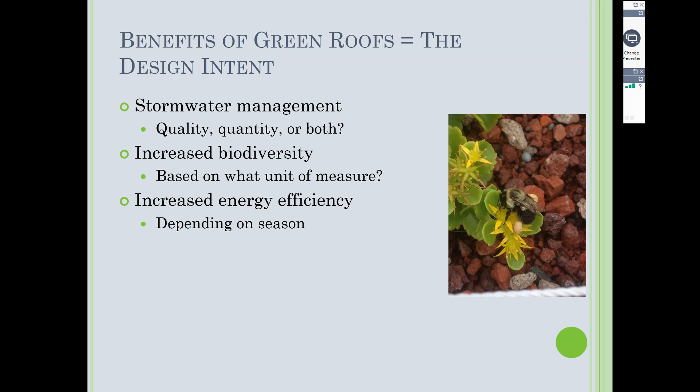And so the good news is in Chicago and other northern urban climates, the benefits of the stormwater management outweigh whatever you lose in your energy. And in all of his scenarios, the winter loss was made up for in the summer. But you do need to know it's not just a one-size-fits-all general, oh, green roofs are going to make my building so efficient, because it depends.

A reduced urban heat island effect, that is to say that a vegetated rooftop is cooler than a non-vegetated rooftop. You're not going to see a noticeable reduced urban heat island effect. You're not going to walk out of your building in the middle of Manhattan and say, wow, it feels so much cooler now that they put that green roof on the building 3 blocks away. You would have to vegetate all of the rooftops. But if we did that, we would see a noticeable decrease in our urban temperature.

Noise pollution management. I haven't seen any stateside research done on this. There is some very interesting work that's been done in Japan and China on using green roofs to mitigate noise pollution, both from above, and they've studied placing a green roof. If you have a terraced building where like one floor looks out onto the roof of another floor, if you green that roof, you get a lot less noise pollution from the street. So that's kind of cool.

Increased aesthetic, we know that when people can see plants, they are more efficient in their working environments. They are happier, and so that's good. Urban agriculture, that's kind of a new field. The last 2 or 3 years of research, we've seen that done.

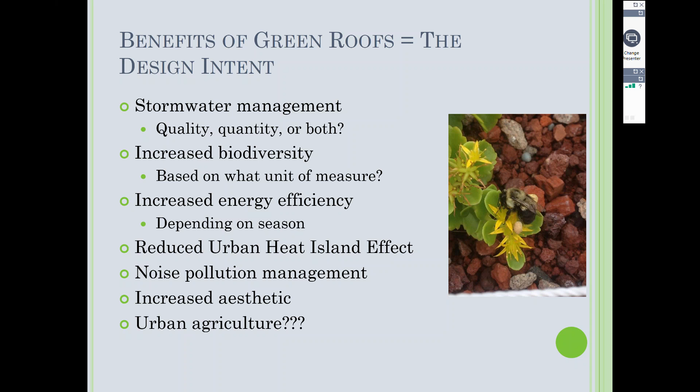My strictly opinion, not based on anything other than a few of the papers I've read, my gut tells me you get more of a social benefit from urban agriculture, from rooftop farming, than food production, because the roof access and safety, and we do have some results out of Spain and Sydney, Australia, that show to produce food on a roof, you use way more water and other inputs than if you try to do that traditionally. So I think you get a very measurable social benefit. I don't think it's a sustainable farming practice, though.

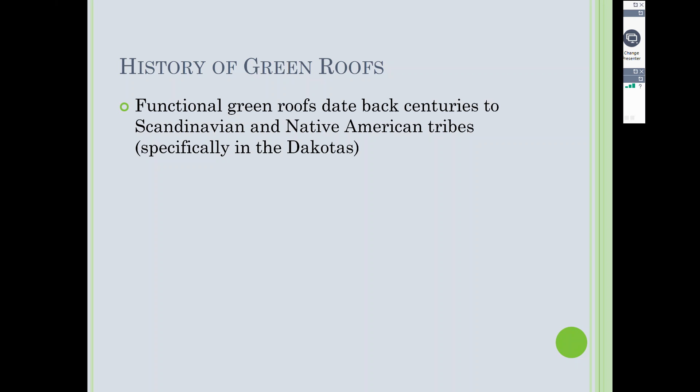History of green roofs. I read this really cool paper back in 2010, and I've quoted it a lot, and people are always surprised to hear this, so I repeat it a lot. Functional green roofs date back centuries. Scandinavian and Native American tribes, specifically in the Dakotas. Aesthetic green roofs, we always hear the Hanging Gardens of Babylon example. We obviously never saw those, but we know based on written accounts, probably those were very elaborate rooftop gardens. They weren't actually hanging in the sky, they were on the rooftops.

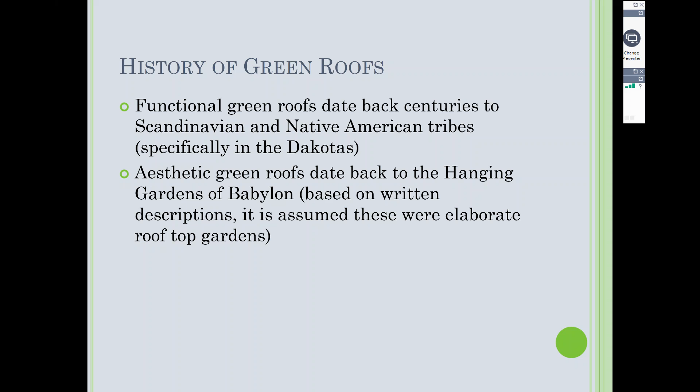Modern green roofs. This is the study that I reference now quite a bit. Manfred Kohler published a paper in 2010. He went through all of the historic green roofs in Germany, and I think his limit was 100 years old and older, and there were quite a few that had survived both world wars. And I cite this a lot, and this came directly from this paper, and people are always surprised to hear it. Despite what some German practitioners would have you believe, the first modern green roofs were an accident.

No one set out to create a green roof. It happened accidentally, and here's how it happened. And this is from Manfred Kohler's paper. In 1839, a barrel maker invented a way to waterproof a roof. And he did that by combining 4 sheets of paper and tar.

Well, once he waterproofed his roof, he wanted to protect the paper from UV light because he knew if it broke down in the sun, he would lose his waterproofing. Makes sense, right? Okay. Well, when you build a building, you usually have to excavate some amount to get the foundation level. So he took that excavation and put it on top of the tar paper to protect it from UV light.

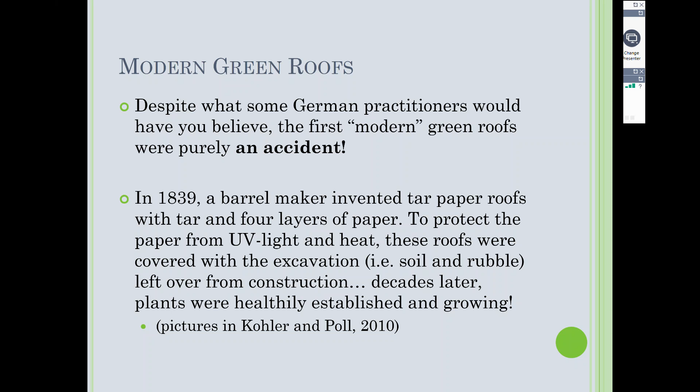And they were lovely. That's what really started the green roof movement, realizing that these plants could grow on a rooftop without much input. That started the modern industry. And that leads us to standards and guidelines. This is something that I drive home in my classes. There's a distinct difference between a standard and a guideline.

A guideline is a recommended but non-mandatory specification. A standard is a mandatory, quantifiable specification that sets the lower limit for acceptable quality for something, whatever that thing may be. The word mandatory implies that there are repercussions for not meeting the standard, and the example I like to use for both of these come from OSHA, because everyone knows OSHA, okay?

So OSHA has standards for eyewear, okay, right? So your eyewear in a construction site should be stamped Z87. That means it meets OSHA's limit for eyewear. It's a standard. If you don't meet the standard, you can be fined by OSHA. OSHA also writes guidelines. They write guidelines on heat stress and sun protection.

The reason they make it a guideline, which is a recommendation and not a standard, is because OSHA recognizes that, for example, 85 degrees in dry heat in Arizona is very different than 85 degrees in the humid heat of New Orleans. So they can't just say, all right, anything over X degrees means you have to do such and such for your employees so that they are protected against heat stress and heat stroke. They also recognize that different humans handle different levels of heat differently.

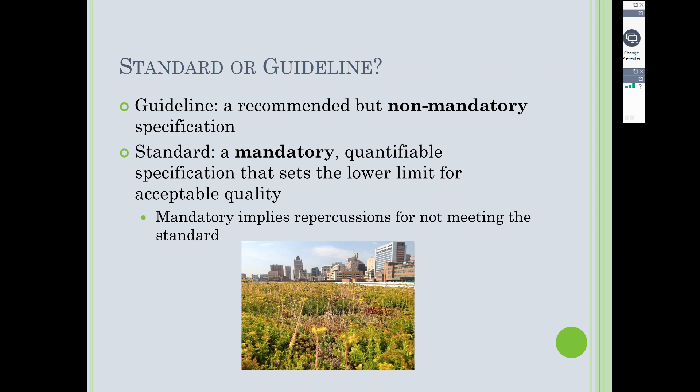So again, they recognized that green roofs, whether intentional or not, were becoming a thing. And once people figured out they could be a thing, they were starting to do them intentionally. So the landscape industry recognized that this basically was landscaping just a few stories up, and they decided to write a manual, a guideline, a recommendation for how to do this best.

The FLL, it's pretty comprehensive. It's not all-inclusive, but they give particle size distribution, water holding capacity, pH, all of these guidelines for the substrate. They give guidelines for plant coverage, all sorts of best practices. It's a really good guideline. They never meant it to be adopted worldwide, but since they were the first to do any kind of a manual or best practice for green roofing, they unwittingly developed one of the first worldwide guidelines for green roofs.

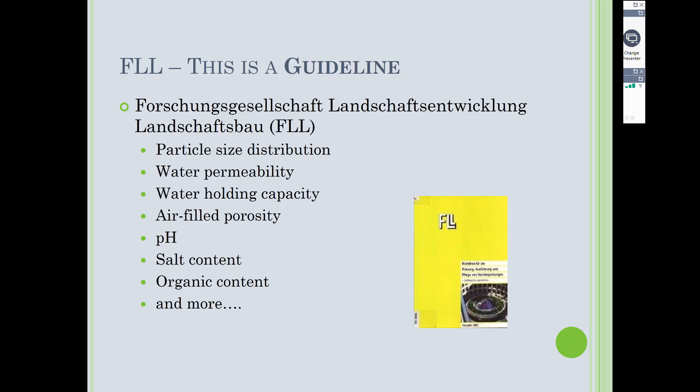So municipalities and countries around the world started adopting their guidelines. We go to the ASTM now. The ASTM is a standard. As of a few years ago, there is a subcommittee comprised of civil engineers and practitioners who are writing standards for the green roof industry.

Here's my beef with the current subcommittee. Many of those members are civil engineers and private sector practitioners who are selling their own system designs. Now, most of their 14 standards right now revolve around the geotextile fabrics, but there are a few of interest. There are fire tests. The fire test standard is excellent. You got to know that your building is not going to be more susceptible to fire if you have a green roof on it.

Saturated water permeability. This is one that I don't think was done very well. Here's why. For saturated water permeability, the ASTM standard says that you need to soak your sample 24 hours before you do the test, right? That's standard. That's an actual soil science and agronomy practice. That's a civil engineering practice. It makes sense that they would have written the standard that way because that's how we test water permeability for medias. That's what we do.

Okay, the problem is that gives you a truly saturated media. All of the water sits there for 24 hours and pushes all the oxygen out. Green roofs don't get saturated, not like a lab test. I have data from my dissertation where my green roof platforms were rained on for 72 hours straight during Hurricane Sandy, and my water holding capacity still only maximized at 28%. If you soak a substrate for 24 hours, you're going to every time in the lab get 50% or more water holding capacity. That means we're overestimating how much water our green roofs can hold.

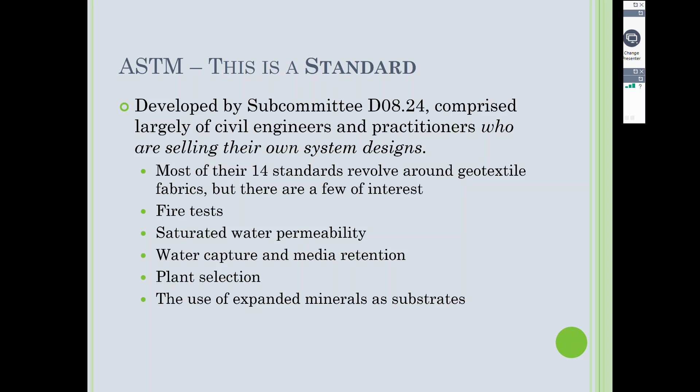LEED. This is neither. LEED is one of the organizations that kind of drives green roofs right now. Leader in Energy and Environmental Design. It's a certification program that's sponsored by the U.S. Green Building Council. And so basically, if you're doing new construction for anything really, you can fill out hundreds of pages of documentation and show all of the ways that you have been a leader in energy and environmental design. You send that application and a check in to the U.S. Green Building Council. They go through it. They come and look at your building, and if you meet and add up enough points, you can earn silver, gold, or platinum LEED certification.

That comes with a bright, shiny plaque that you can hang in your lobby and boast that you are a leader in sustainability because you have met the LEED standard for whatever certification you earned. You can earn points for everything from having low emission glazing to only using building materials within a 500-mile radius. There's all sorts of things. It's very comprehensive. Last I checked, you could only get, I think, 6 points for having a green roof, but 6 points can make the difference between no certification or silver and gold. So we often on LEED buildings do see green roofs. But remember, it's not a standard.

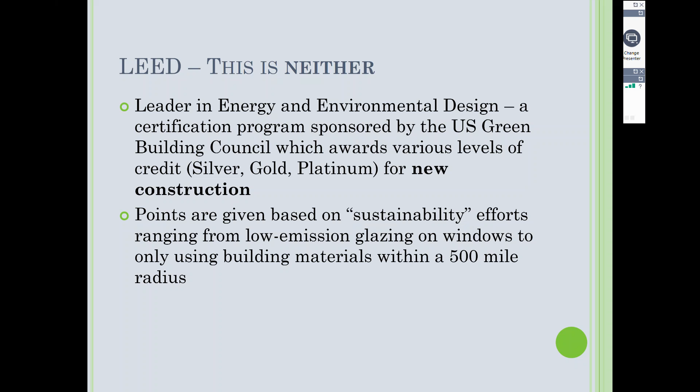Here's my unadulterated, honest opinion. It's a money grab. I have yet to see data-based proof of a measurable environmental impact. That is not to say that it's not good, it's just not great. Certifications for LEED buildings can go over $20,000. This is direct from their website. Tell me this is not a money grab. You can also be a LEED certified professional if you pay $400 after you've paid for your membership, plus the cost of the study materials. Are you starting to see a trend?

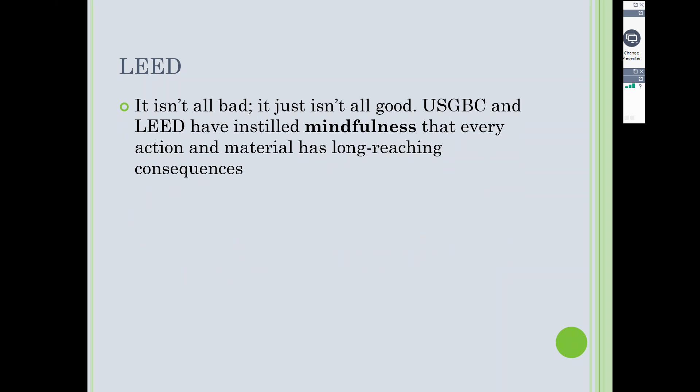That's not to say it's all bad. It just isn't perfect. They have instilled mindfulness that every action and material does have long-reaching consequences. My beef with LEED is they don't have any performance-based accountability, and I'll tell a short story. When I was an undergrad at Auburn University, we got our first LEED building.

Auburn may have more than one at this time, but at the time it was the first one. And that was when I was first getting excited about green roofs, and I was so excited that we were finally going to have a LEED building. And I want to think it was silver or gold. But it was a new construction science building.

And one of the things that that building had to make it LEED certified was we didn't have a green roof on it, but all of the downspouts for the building went into this engineered bioretention area adjacent to the building. And so it collected the stormwater in that way, and it kept it on the site. And it was awesome. Okay, well, that lasted for about 6 months.

If you've seen bioretention, you know often instead of having wood mulch, it's rocks, because rocks don't float. And if you're going to have a bioretention cell full of water, you don't want all of your mulch to float away. That's kind of a common thing. Well, during football season, I'm assuming during football season, someone saw that and it didn't match the rest of the landscape on campus and they didn't like it.

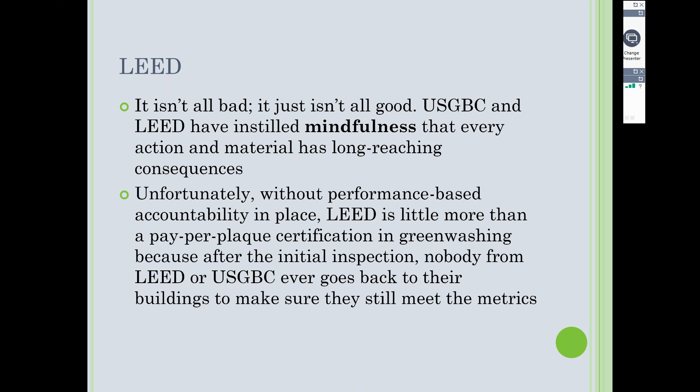And so not terribly long after, they dug that up, capped it off, and put a traditional landscape back around that building. It was no longer capturing the stormwater. The stormwater was then going into the drain. Now, did anyone from LEED come back 1, 3, 5, 10 years later to see if that building still met the metrics? No. And they got to keep the very expensive plaque that they paid for. That's my problem with LEED. Okay, moving on off of my soapboxes.

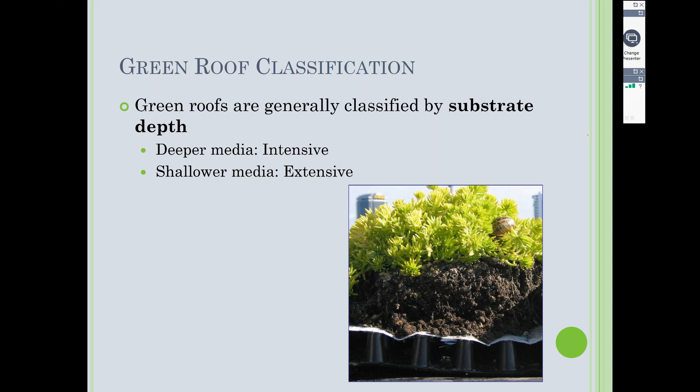The white is a filter fabric. You have to keep all of your media out of your drainage layer because you don't want to clog your drainage layer, because that kind of makes sense, right? Here's your substrate, and then here's your plants. So the depth of that substrate layer is what determines the classification here as either intensive or extensive. And the idea there is that the deeper the substrate, the more maintenance you're going to have to do.

If you are in the industry or if you are doing research, check with your state stormwater manual. I actually did this search a few weeks ago for my class. All 50 states, even Alaska and Hawaii, have stormwater management protocols at the state level. Sometimes it's their Department of Environment, sometimes it's the Department of Natural Resources. It depends on what the state is, what it's called. But every state now has stormwater management guidelines that have to be met, and most of those include green roof criteria. Even Alabama has green roof criteria now at the state level.

That typically is where you're going to find the official delineation for intensive and extensive, and it does matter because, for example, in Maryland, if you break the line between intensive and extensive, you no longer get stormwater management credits for having a green roof. It has to be extensive, not intensive, okay?

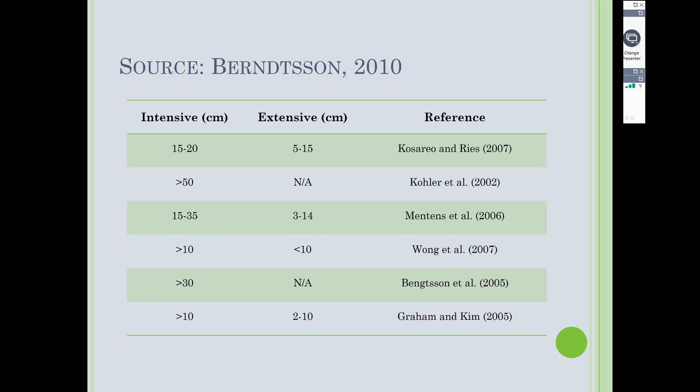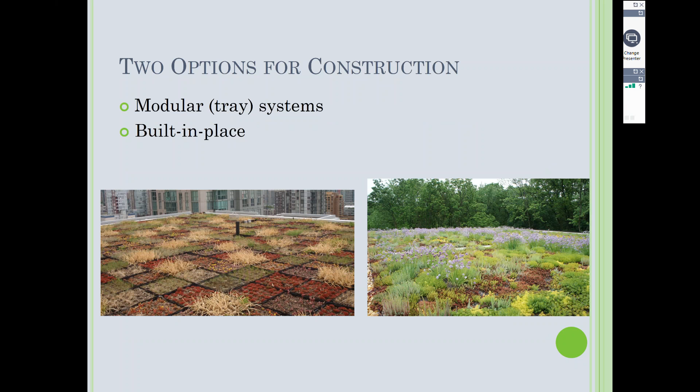All right, so there's two options for construction. You can have a modular or a tray system, or you can build it in place. I'm going to talk about each one of these. Modular systems, not a fan. Here's why. The ease of installation is a fallacy because you still need a crane. If you could get away without paying for a crane, I could possibly see the justification.

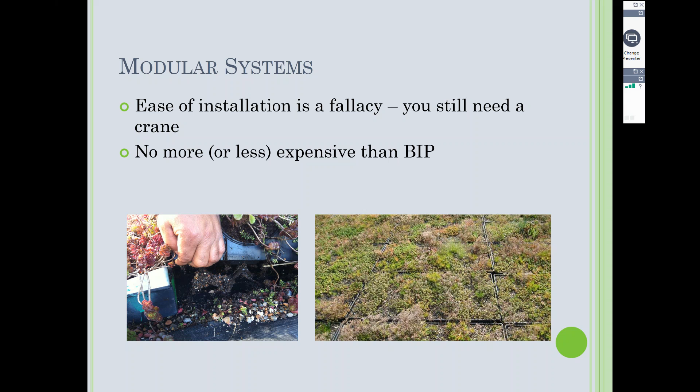The problem is it's no more or less expensive than a built-in place. Instead of paying your guys to shovel and move substrate around your roof and plant the plants, you're paying them to walk back and forth, placing trays on a roof. It's not any easier or less expensive.

Also, with a built-in-place system, you're really just paying for the labor, the substrate, and the plants. For a tray system, you have to pay for all of that plus the trays, so it kind of doesn't make sense. If you're looking at it from a sustainability standpoint, think about all of the plastics that were manufactured going into that system and tell me if it's still sustainable. And then it's a maintenance nightmare. Now,

This is going to vary based on region, but where I was on the East Coast, we had about 30 freeze-thaw cycles every winter, and that's based on my dissertation data. And what I mean by freeze-thaw cycle is in the winter, the nighttime lows were below freezing, and the winter daytime highs were above freezing. That gives you a single freeze-thaw cycle. All right, so what happens when water freezes?

It expands. Okay, so if your green roof media is up there holding any amount of moisture, and in the winter it is typically a little bit wetter, especially there, it rains more, you have snow melt. So that substrate expands and it pushes against the sides of the trays. And what happens? It breaks. And you can see the picture on the left, the media has started falling out of that tray along the bottom. In my experience, that corner where the bottom meets the wall of the tray, that's usually where they start cracking.

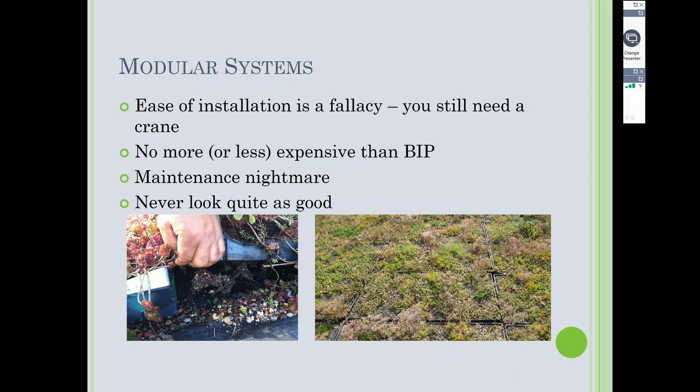And if you think about it like this, instead of one 10,000 square foot green roof, you now have 10,000 one-square-foot green roofs. Your big area is going to hold more water. Please don't do this. Okay, so here's your starting point if you're going to do a built-in-place system. This is the French Embassy in Washington, D.C. My former employer installed this system.

And what you're seeing is a waterproof roof. Now, I've heard people say, well, I don't want to put plants on my roof because it's going to come inside my building. Dude, it rains all the time and water doesn't come in your building, so you're going to have to waterproof it anyway, right? If the waterproofing is done well, then you shouldn't have any problems.

Another thing, if you're in the industry or if you're a landscaper and you're considering starting to bid on these jobs to open up your book of business, please have written into your contract or have written into your bid someone to do a certification for the waterproofing membrane before you step foot on that roof.

And that means they'll cap off the drains and they'll flood the roof and they'll shoot it with electricity, and there are wires up under the waterproofing, so if there's a leak or a breach in the system, they'll know, one, that it's there, and two, where it is so they can fix it, because the last thing you want is a leaky roof that was leaky before you got on the job, because if you go put a green roof on a roof and something, I don't know, penetrates the waterproofing membrane, you're going to get blamed.

So it's kind of expensive, but it's worth it to build into your bid to not be responsible for repairing the waterproofing membrane down the road if you didn't do it. Now, if you did it, that's a tough lesson for your employees to learn.

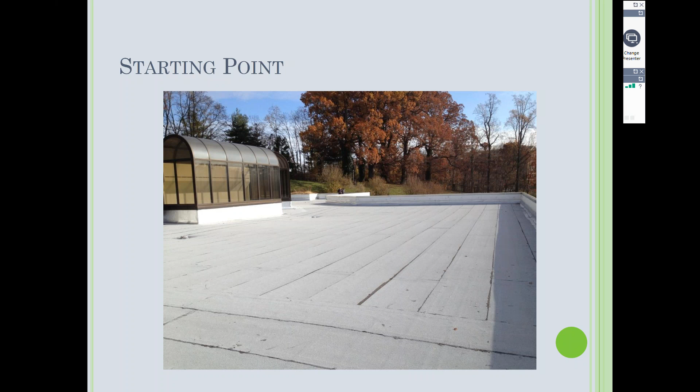Okay, so this is the waterproof roof. Here's that cut section again. Most building codes, and this is especially true in DC, most of those building codes weren't comfortable with having plants grow all the way up to that parapet wall. So all of our roofs had an edge of gravel where plants were not supposed to grow. And then the same thing around, here's a drain box.

This is a protective fabric that goes on top of that waterproof membrane just to protect it against anything that could happen. So that pea gravel would go around that drain, and then we would put metal edging that had water holes cut through it so that the water could drain out around there. So that was meant to be a protection against where the waterproofing ended and the flashing began so that roots could not grow in there.

Okay, so let's go back out of my pen.

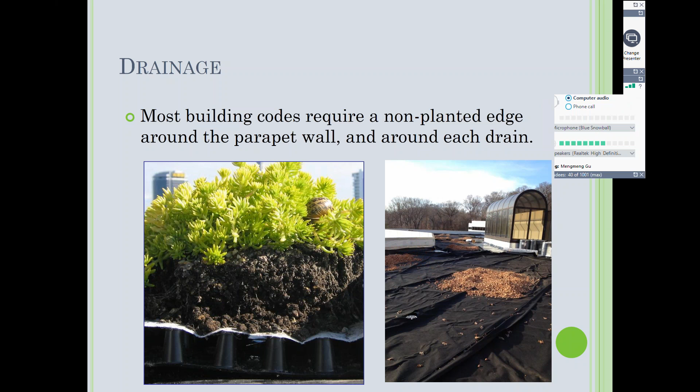All right. So here's how we got the substrate up to the roof. Now, this is a blower truck, and so basically the truck, there's a big hose here that sucks or blows the media up onto the roof. Now, in DC, because green roofs are so popular, it costs about the same to rent a blower truck for a day as it does to rent a small crane for a day. So for us, what dictated this was the French embassy said, no way you're getting a crane onto our property, so we blew it. So we would do either way.

Why is my pen not working?

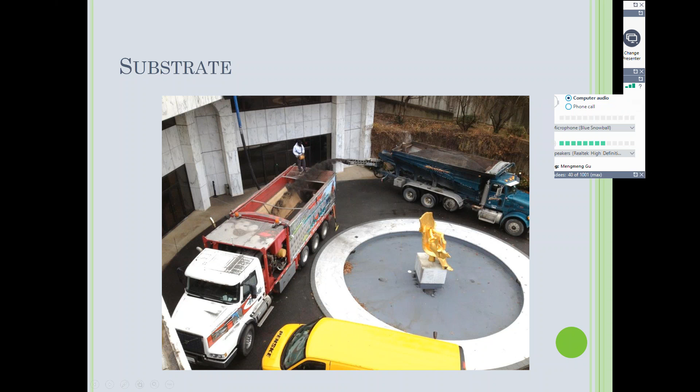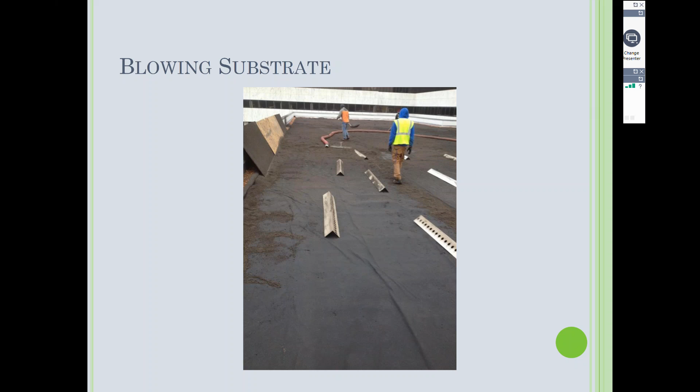Okay. Here you can see those pieces of metal edging with holes cut in them. That was going to go around the parapet and around the drain boxes. And there's the other end of the blower tube where it's blowing media. And then we can talk about various plant installation methods.

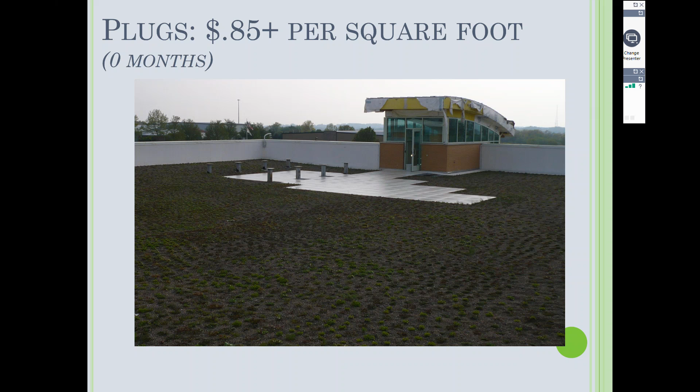So plugs, this is not a great picture, but this is a roof right after it was installed, 0 months after installation. Plugs, these prices are probably not exactly accurate anymore, but for us it was about 85 cents a square foot and up, depending on what kinds of plugs we wanted. 6 months later, we're at 80% coverage. Those are not weeds, by the way. Those are spent flower stalks from dianthus.

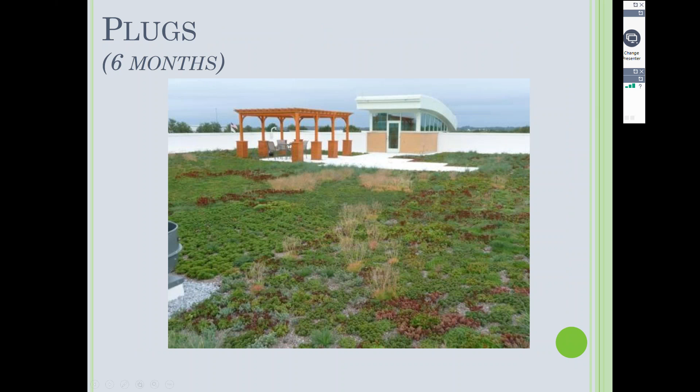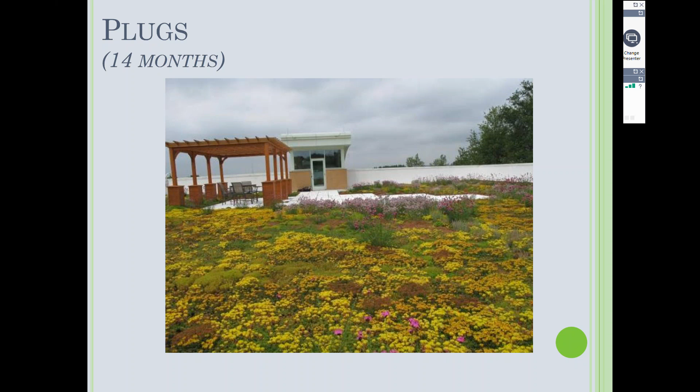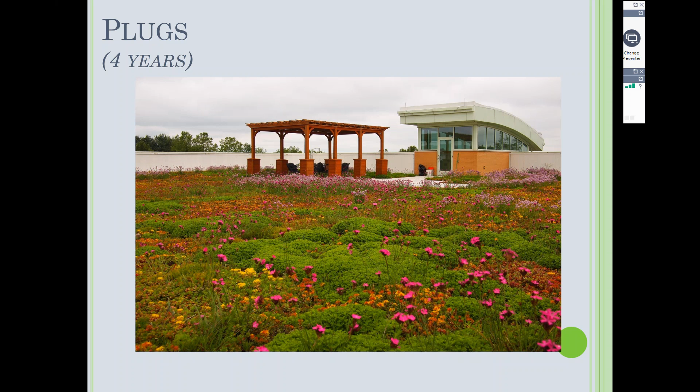14 months later, up in the foreground, you can see the dianthus in bloom. The light purple in the back is allium. We're fully covered here, and this is 4 years later. And you can see there are ebbs and flows of species. In wetter years, certain species are more prolific, and then in drier years, other species are more prolific. A mixed community planting is always going to be better so that a dry year isn't going to kill your roof. You need to have various species of sedum.

Pros for plugs, it's cheap. Installation requires little to no skill. Anyone can do it, even a Bama fan.

Cons: exposed substrate allows wind uplift. Now on that roof, we had a tall 4-foot parapet, so we didn't really have to deal with wind shear. But on some of our city roofs, especially in DC, wind shear was always a terrible problem for us.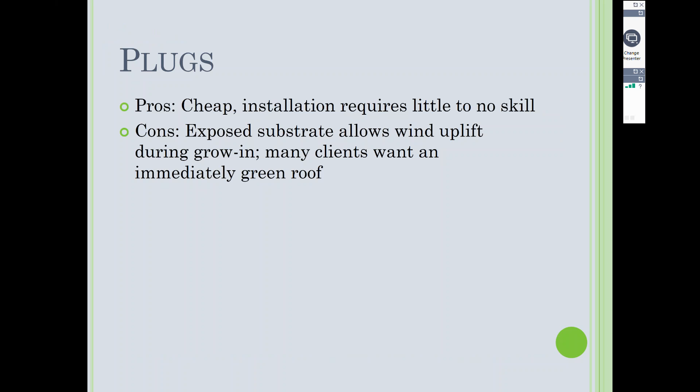And then some clients want an immediately 100% covered green roof. We had an architect say, hey, I want a green roof, but I want it to look like one solid plane of plants. He didn't want those mounding broadleaf plants. So we decided to experiment with cuttings. Cuttings 5 months later, 16 months down the road, and it looks like a pretty solid plane of plants.

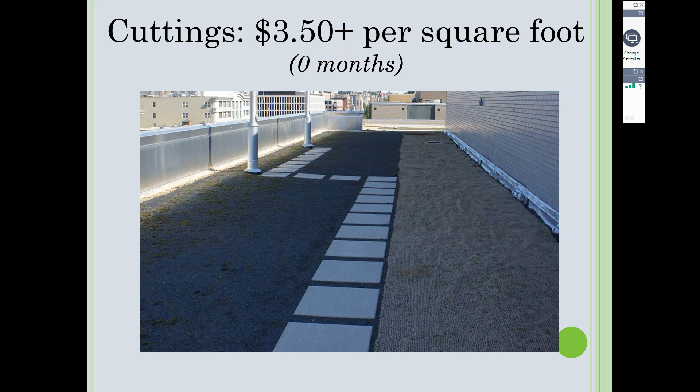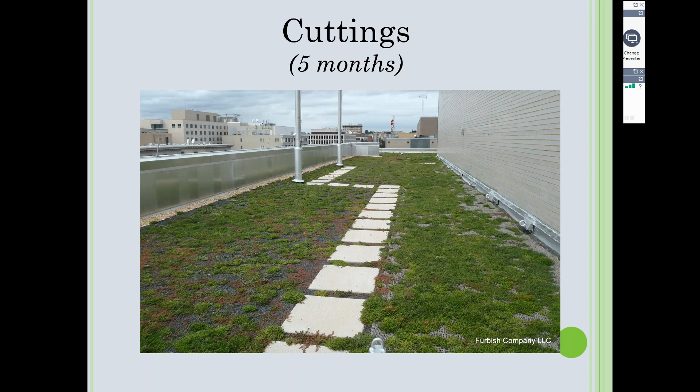And you can see there's netting on the right side. That's to protect against wind shear. It's jute. It does break down. By the time it breaks down, the plants have grown through it. No big deal. And on the left, you can see that gravel edge around the parapet wall where you're not supposed to have plants growing. Obviously, our maintenance guys had slacked up a little bit there.

Pros: faster full coverage. You can get a lawn look easier, but it can get expensive. If you have to buy your cuttings, you're looking at over $10 a square foot. Cons: you're limited to narrow-leaf sedum species. Cuttings can and will blow away, so you either have to use netting or get creative.

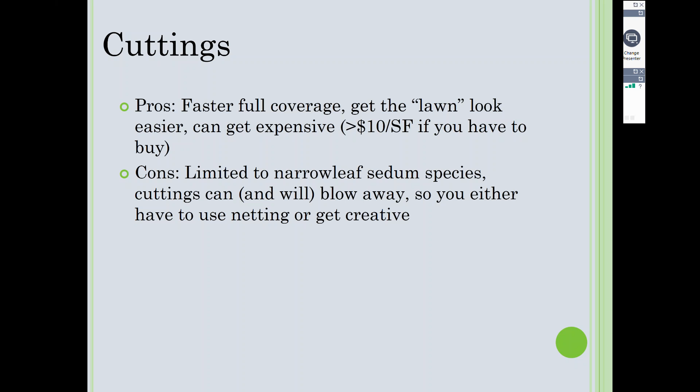We were actually able to harvest some of our own roofs. I could harvest my roofs and sell them to my installation division. In that case, I was only paying for labor. He was happy because he was paying less than he would have to order them, and we were doubling our profits.

Cuttings and plugs. You can mix those if you want certain species. There we go. Pros there, the plugs are going to help block the wind from blowing the cuttings away, and you can kind of see there, we have plugs planted, and I know what I'm looking for, so I can see it, but in between those plugs, there are cuttings spread on that media. But because you have a little bit of a tall plant planted as a plug, it actually does help protect those cuttings from blowing completely off the roof, and you can see the parapet wall on this roof is quite short.

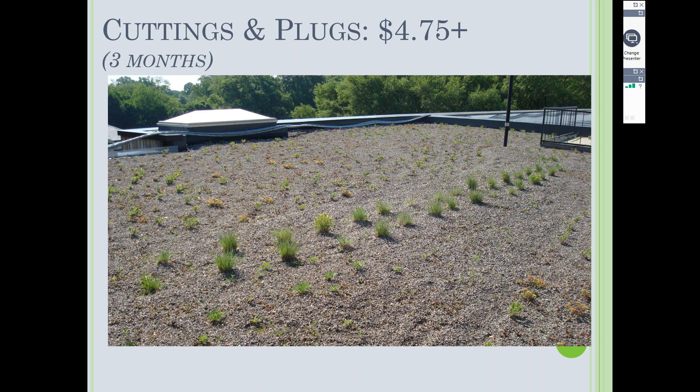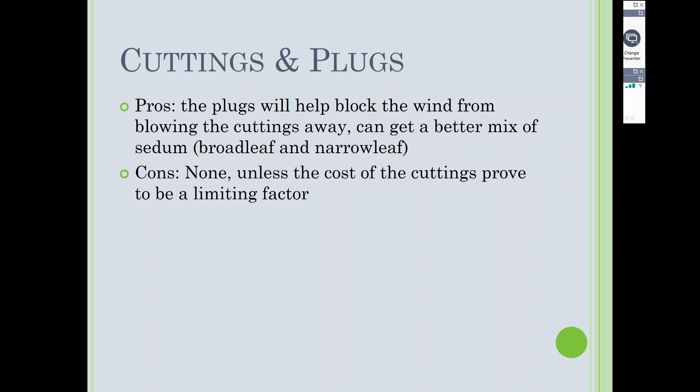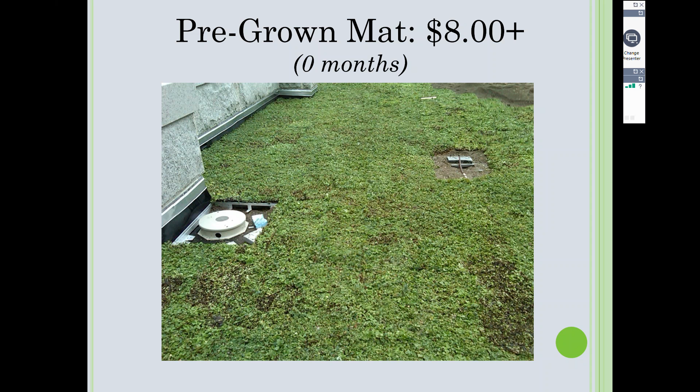Pre-grown mat. This is right after installation. I'm not a fan of pre-grown mats, and if you are a horticulturist, you will understand why. These mats are grown in peak nursery conditions. They are fertigated, they are irrigated every day, they are beautiful. I've been to Sempergreen's growing facility in Culpeper, Virginia, and I can tell you they are gorgeous out in the field. And then they're cut and rolled up and put out on a roof, and they're grown in coconut coir, which is bad for two reasons.

One, there's a high C/N ratio, which means when you put it out on a roof, all of your microbes are going to start working on breaking down that carbon. And since they were fertigated heavily in the nursery, that wasn't a problem. But when you put them out on a green roof where they're not being regularly fertilized anymore, they start showing signs of nutrient deficiency. Those big patches of green, those are clovers. Clovers are a sign of nitrogen deficiency because the microbes trying to break down that coconut coir in the media have taken everything away from the plants, and now clover has come in.

The other problem that you can get is Phytophthora. The only roof we ever had a Phytophthora problem on was a pre-grown sedum mat. My guess is there was so much organic matter coming in from the nursery. When it went out, it just happened to go out at the end of summer when it was humid and rainy. And just a couple weeks after installation, it rained, I want to think like every day for a week. And then the whole roof just rotted. It just rotted black. And it was Phytophthora that was introduced from the nursery.

The other thing, these pre-grown sedum mats don't like to root in, so you start getting grass and weeds coming in and outcompeting the sedum. You go from a perfect, well-watered condition, and those sedum mats are not hardened off before they harvest them.

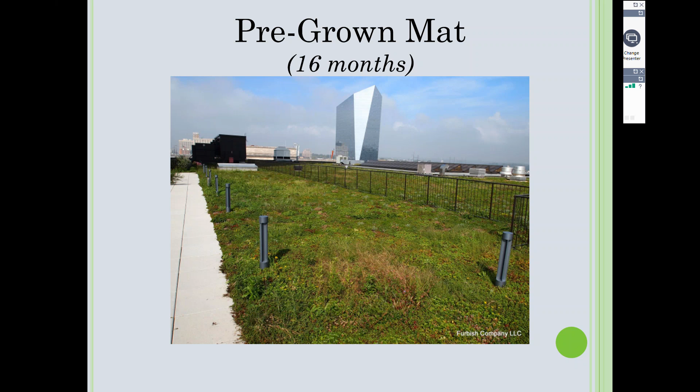All right, so I'm not a fan. They're expensive and they're very hard to grow in, and they don't ever look as good as they're supposed to. The pros is it's an instant green, and that's why they sell, is you sell to the client like, oh, you have an instant green roof. They're never hardened off. They are often rotten when they arrive to the site. You should only have a 12-hour installation window.

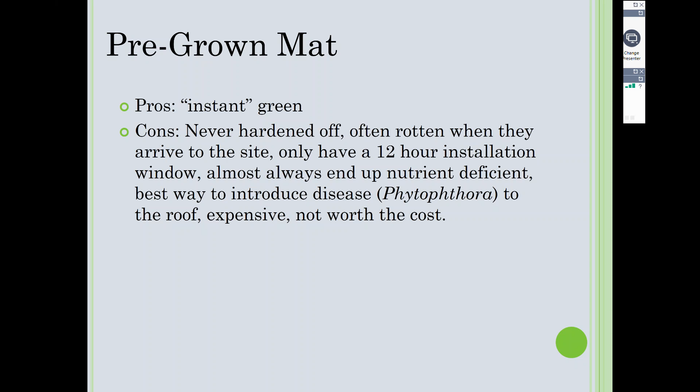You need to treat these things like turf grass. Turf grass needs to go down 12 hours after it's cut in the field. These need to be treated the same way. Often they are not. They almost always end up nutrient deficient because you have a lot of carbon material in that media that it was grown in. And it's the best way to introduce a disease to your roof. They're expensive. They're not worth the cost.

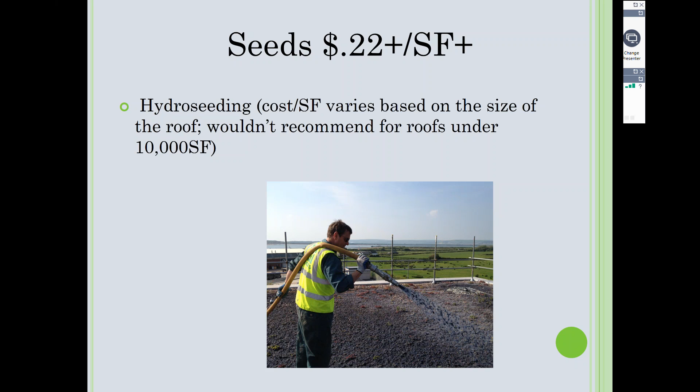Okay, seeds. This is where the research is starting to go. There's a guy in Oregon, and I forget his name. Oh, I just had a mental blackout. He's starting to do some work on establishing green roofs from seeds. And right when I was leaving the company, we were starting to toy around with that as well. Now, hydroseeding, the cost per square foot varies based on the size of the roof. I wouldn't hydroseed for under 10,000 square feet just because by the time you pay for the truck, it's not going to be worth it. However, you can do it yourself with a fertilizer spreader.

Pros, you have an almost limitless plant palette. You can buy sedum seeds. You can buy dianthus seeds. All sorts of seeds. I would love in Texas to start playing around with bluebonnets because bluebonnets like drought. If you hydroseed, you have no risk of wind uplift for that exposed media because it kind of creates a glue and it's going to hold it down.

If you hydroseed in February, you should have about 80% coverage by June as long as you have high enough germination percentages. We all know as horticulturists that when plants are grown in their final environment, they typically are healthier and will generally perform better than a plant that gets transplanted. Cons: the client may not like the color of the hydroseed solution, or they might expect an instant green vegetated roof, but it can be cost prohibitive if it's a small roof because you have to pay for the hydroseeder.

You can sow seeds with the fertilizer spreader. You literally just mix the seeds with dry sand. I've done it myself. It's easy. It's very inexpensive. Can't go wrong. I think this is where the industry needs to go in terms of southwestern green roofs where we don't have a sedum palette. And next week I'll talk about why sedum don't work here. They're not going to work here. We've got to find something else that can work down here when it gets hot. And I think this is the way to do it. We need to start toying around with seeds.